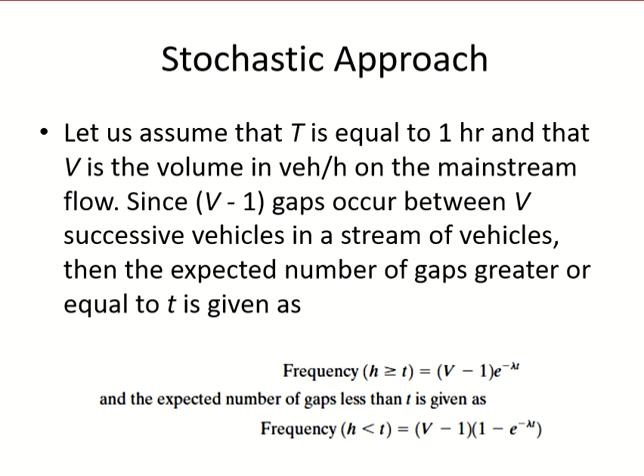We are moving in the direction of stochastic analysis. Basically, we said that the flow or the headway don't have a definite value in the traffic, because they are not uniformly distributed. So when you say there's a flow of 3,600 vehicles in an hour, it doesn't mean every vehicle after every second. So the headway can be unevenly distributed.

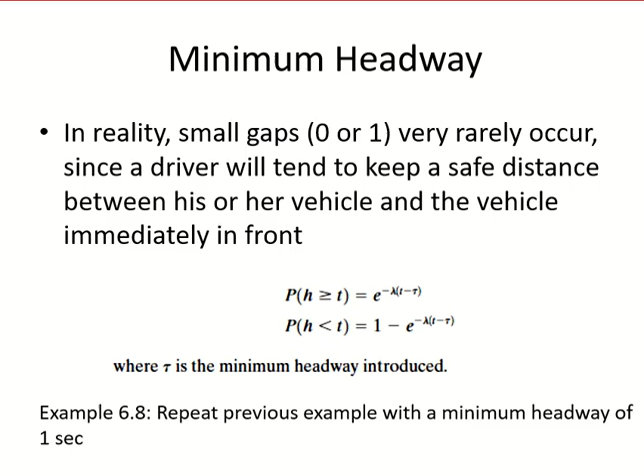So any headway, 2-3 seconds, has a chance of being there. And we looked at the equations from which you can calculate the probabilities. And using those equations, you can also calculate the chance that the vehicle can enter into the flow in the gap analysis.

Now we will move on to the queuing theory. We already did something from it with the shock waves. We did some sort of queuing theory analysis with the shock waves. But here we will be talking about basically the congestion. The shock wave can even be because of the signal as well, but with the queuing theory, now we are focusing more on the congestion.

Congestion results, as we know, in the form of queues, and it can be on expressways, on ramps, off ramps, different types of intersections. So this theory basically has the algorithms or the equations which describe the process resulting in the formation of queuing. How the queues are formed, equations explaining how the queues are formed, that is queuing theory.

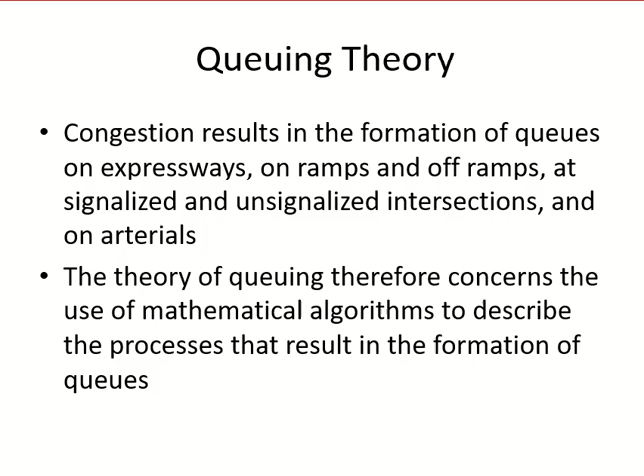We started this chapter with traffic flow theory. So I defined it as the theory or the equations which define traffic flow. The same goes with queuing theory as well, the equations or algorithms that define queuing. When we are considering the queues, there are certain factors we need to take into account.

First of all, the arrival patterns. We have already discussed them. Arrival patterns basically relate to the flow, the type of flow you have. So you can assume the flow to be uniform, or you can assume the flow to be probabilistic, Poisson distribution. We already did the equation with Poisson distribution. So these are the most commonly used flow assumptions.

So arrival rate refers to how the flow is coming. Is it uniform or is it probabilistic? Deterministic or probabilistic? Uniform or Poisson distribution. Then how many channels you have? Channels is from how many lines you can serve the flow.

So if you are talking about a highway, the number of lines is the number of lanes you have on the highway. If you have 3 lanes, there are 3 channels. The cars can move from 3 different lines. On an intersection, the channels will be different for each movement. So you may have a channel for right turning, a channel for left turning.

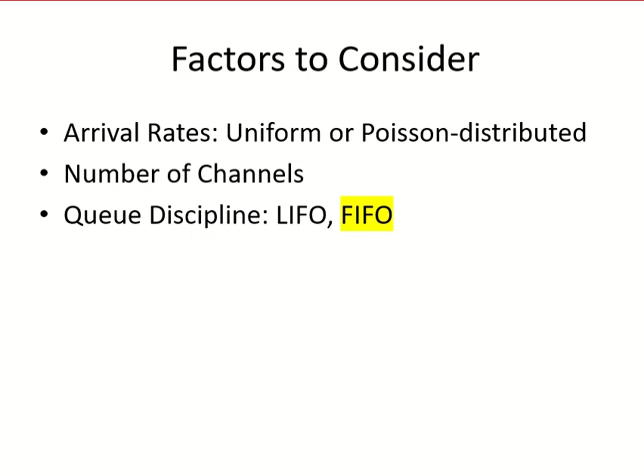Okay, now my question is, which one of them applies to traffic, LIFO or FIFO? Which one for traffic queues? First in, first out. Yeah, it should be, right? Yes, first in first out. This is what we assume, right? That the queue will leave from the front. But we have some very skilled drivers. They find their way. They come from other lanes and shoulders and whatnot.

So now we will move on to different queuing scenarios, starting with deterministic scenarios, deterministic analysis. So the flow is coming in a deterministic way. It's uniform. The flow is uniform, coming in a uniform way. Now you see here they have different terminologies.

D/D/1. The first D refers to arrival. The second D refers to departure, type of departure. First D type of arrival, second D type of departure, and one means number of channels. So D/D/1 means I have deterministic arrival, deterministic departure, and I have one channel.

Deterministic arrival: the flow is coming uniformly, so there is a fixed interval between every two vehicles, no probability. Then deterministic departure as well, so between every two vehicles leaving the lane or the booth, there is again a fixed interval. And how many lanes or channels I have? One. Now within this scenario D/D/1, I can have four cases.

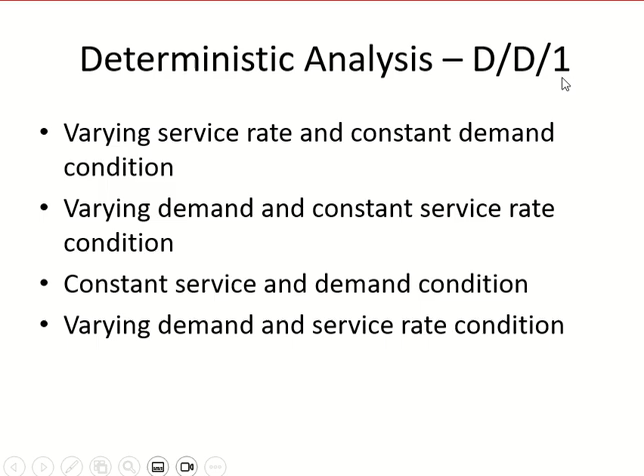Okay, so any questions up till this point? It's all clear? Yes, doctor. Okay, thank you.

So moving on, now you understand the scenario, so we will dive straight into the examples. For each case there will be an example. So we have now constant demand and constant service. According to time it doesn't change.

So vehicles are entering at a recreational park. There is a single gate, and on this single gate all vehicles have to stop. The park attendant will give them a brochure. The park opens at 8 a.m., at which time the vehicles begin to arrive at a rate of 480 vehicles per hour. So this is the demand rate.

At 8 a.m. Then after 8:20, the demand arrival declines to 120 vehicles per hour. So from 8 to 8:20, 480 vehicles per hour. Then from 8:20 onwards, 120 vehicles per hour, and it continues at that level for the remainder of the day.

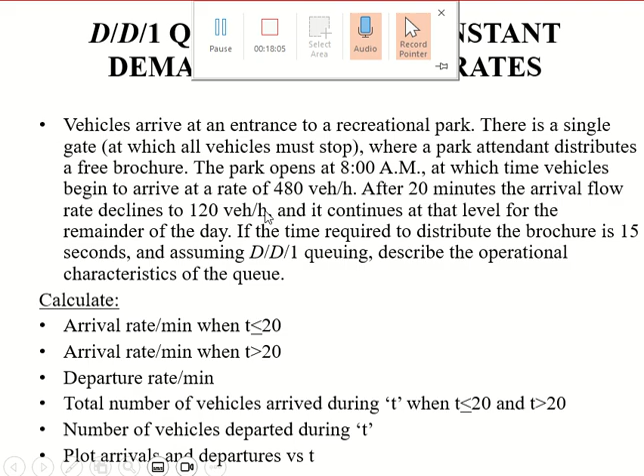Okay. Then for when the time is more than 20, it is 120 per hour. So 120 per hour, so 2 per minute, right? Okay, so this is done. Yes. Departure rate per minute.

Now for departure service, 15 seconds. Every vehicle takes 15 seconds. So if every vehicle takes 15 seconds, then how many vehicles can I serve in 60 seconds? 1 minute means 60 seconds. So every vehicle takes 15 seconds, and in 1 minute I have 60 seconds.

So in 1 minute I can serve 60 upon 15. The total time I have, 60 seconds, divided by time per vehicle, which is 15 seconds. So I can serve 4 vehicles per minute. Okay, is it clear up to now? Yes, doctor. Okay.

Total number of vehicles arrived during time t when time is less than or equal to 20, and then when time is more than 20. So we are looking for equations here, because they did not say time 2 minutes or time 3 minutes. So they are looking for equations to calculate number of vehicles arrived.

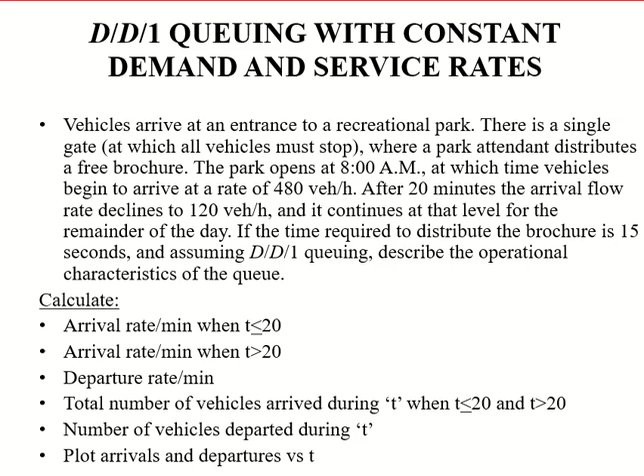Any vehicle which comes from 8 o'clock till 9 o'clock, 60 minutes means 9 o'clock, right? 1 hour. So any vehicle which comes between 8 and 9 will see the queue and join the queue. Any vehicle which comes after that will not have any queue, so they'll just come to the booth directly, spend 15 seconds for the brochure and then leave. So in this first hour when the queue is there, how much is the delay?

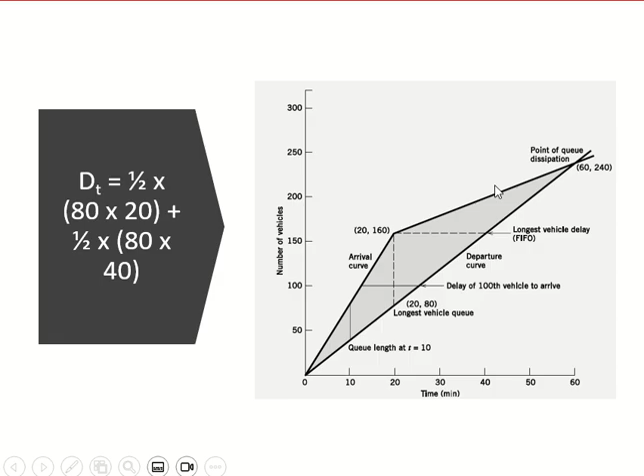For the next right angle triangle, the time is from 20 till 60, so the time is 40. You can see over here, 40. And the difference of height is the same. I cannot take the difference of height here, it will be 0. So that's why here. If you have a line, let me see if I can.

Not this. If you have a line going like this and then this, it is changing the slope here as well. It changes the slope from here to here, and then again it becomes, so you will then take 3 right angle triangles, one from 0 till 20, another one from 20 till this point, and then from this point till the end. So we'll take 3 right angle triangles then.

Now for this triangle which is in the middle, you will take the mean of the heights, because the heights in the first triangle were easy, right? Here it is 0, here it is the difference between them. For the last triangle again, here there's a difference, and on the last point it becomes 0. So the difference you can only get from one point. But if you have a right angle triangle in which at both ends you have a difference in height, you will take the mean. So it will become like a trapezoid, I believe, something like this. I forgot the name, but it becomes like this.

So the number of right angle triangles will depend upon at how many points the difference in height can be taken, how many points the slope is changing. In the case of this question, the slope is only changing at one point, so we made 2 right angle triangles. If it changes at more points, you will make more triangles. So this is what you have to keep in mind.

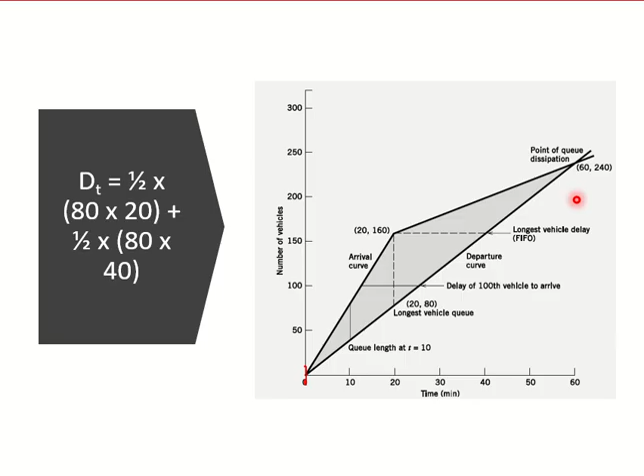So I need to find a time when both of them are equal. I need to find the time when the queue becomes 0. I will calculate the delay up to that time. So they told me on the non-priority gate, remember, non-priority gate, the vehicles are serviced at 20 per minute. Okay, 20 per minute.

So 20 into t. Okay, but this t, when they start serving, so serving starts at 6 o'clock. But the t I'm using in the equations is measured from 5:45. So in the first 15 minutes we are not serving anything. So the serving starts when the time crosses 15 minutes.

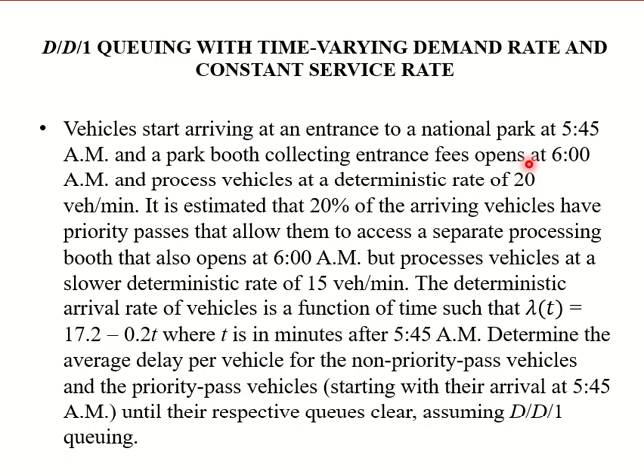So between 5:45 till 6 there is no serving. I'm putting t in the equation, which is from 5:45. So in the first 15 minutes there is no serving. After the first 15 minutes it starts serving at 20 per minute. When you do it for the priority pass, it will be 15 per minute. So this is what you see here.

This is the gap between the t of my equation and the time of serving of the gate, 5:45 to 6. So this is number of vehicles arrived, number of vehicles departed, 20 per minute multiplied by the time. So you make them equal and you get the time when the queue becomes 0. The queue becomes 0 at 33.6 minutes.

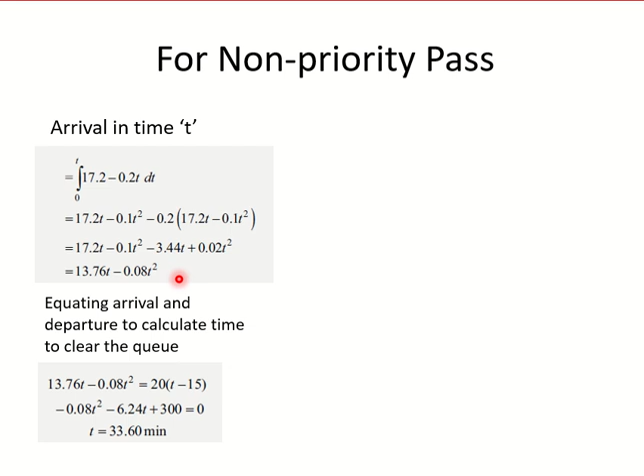Initially at 5:45 the queue will start, no serving; at 6 o'clock the queue has been established, and then when they start serving, the queue will get less and less, and in approximately half an hour it will completely go. I will go quickly through it now. I already have the equation for number of vehicles arrived, so I'll take this time and put it into this equation. How many vehicles arrived in 33.6 minutes? 372 vehicles.

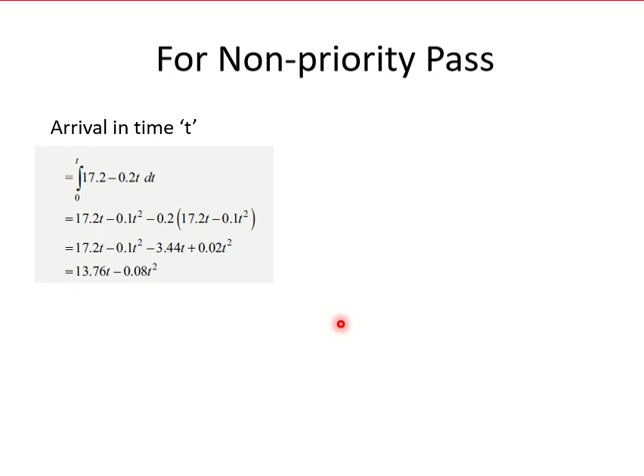Now I want the delay. Delay is the difference of areas between number of vehicles arrived and number of vehicles departed, the difference between the integral of this equation and the integral of this equation. Whenever you need the area under the curve, you take the integral. So integral of this equation minus integral of this equation. Same thing we did here for this graph, but here it was lines. Now we have curves, so we have to go the mathematical way.

So this is the integral of the number of vehicles arrived equation. This is the integral of number of vehicles departed equation. And in both of them you will put the time 33.6, because the delay is calculated when the queue is finished, when the arrival becomes equal to departure, so 33.6 minutes. After you take the integral, you will put the time 33.6 everywhere.

And what else? They have 372.02, which is what? I will have a look, but the thing is you take the integral and you put the time 33.6. I don't know why 372 is there. Maybe they already took the integral and inserted the values. But the point is integral of this minus integral of this at time 33.6 minutes.

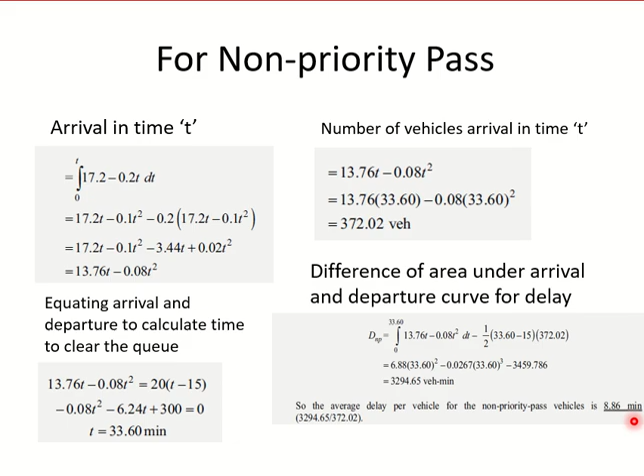So you will get the total delay. If you want the average delay, it's total divided by number of vehicles. So you will get 8.86 minutes per vehicle, which is total delay divided by number of vehicles. The number of vehicles came from here. Do you have any questions on the method? I will check what this last equation is.